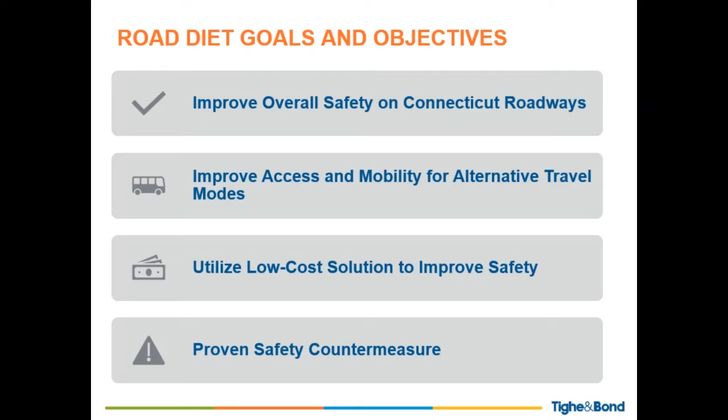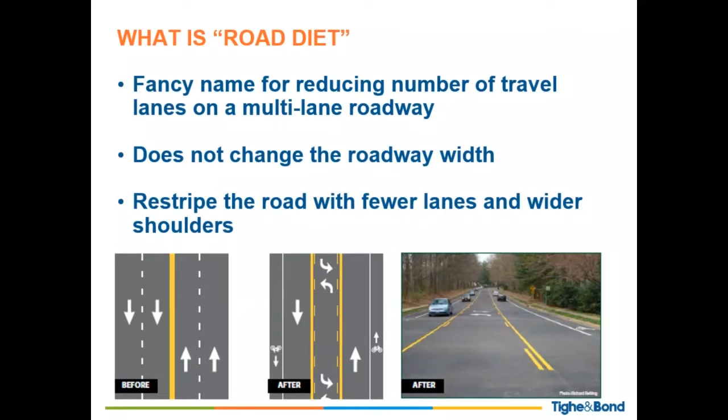Looking a little more closely at the Route 349 road diet, the project limits are Eastern Point Road from Benham Road to Chester Street. That section of Eastern Point Road is currently 3 lanes wide, and we're proposing to convert 3 lanes to 2 lanes. We would reuse the space for wider shoulders, which could accommodate bikes in the shoulders and also increase the buffer between cars and the sidewalks.

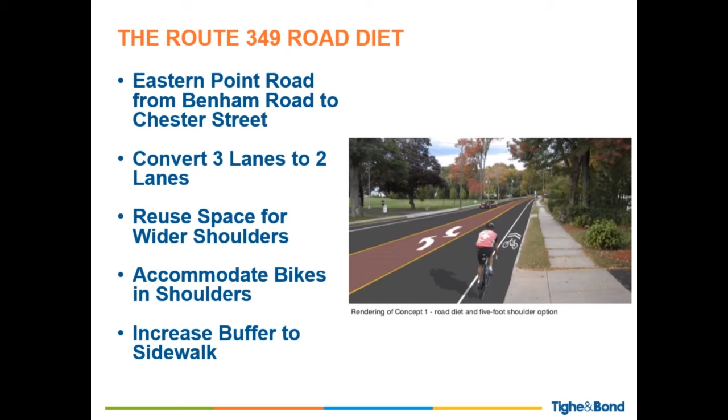So why are we proposing a road diet? A road diet is a proven safety countermeasure. Across the country, they've been shown to reduce overall crashes from between 19 and 47%. They reduce rear end and left turn crashes, and they can also calm traffic and provide for more consistent travel speeds on a section of roadway.

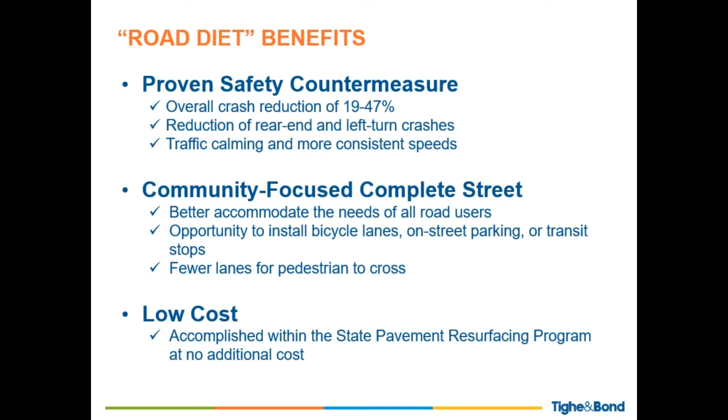Another benefit is that through a road diet, you really convert a roadway to a community-focused complete street that accommodates all road users. And finally, a road diet is beneficial because it can be implemented at a very low cost. For Route 349, the state is conducting a repaving program right now, and if the road diet is approved, we would just apply the road diet pavement markings following that project.

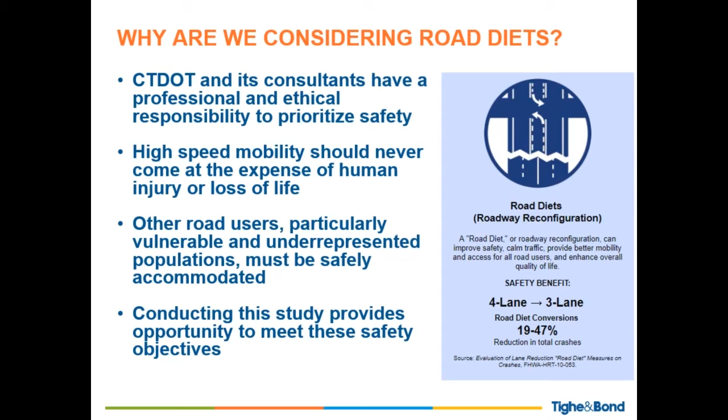We are considering a road diet for 349 because ConnDOT and its consultants, we have a professional and ethical responsibility to prioritize safety. We don't want to encourage high-speed vehicular mobility at the expense of human injury or loss of life. And we want to look at the transportation system for all users, not just cars, particularly the vulnerable and underrepresented populations. And finally, we're conducting this study to provide the opportunity to meet these safety objectives.

The purpose of this public information meeting is to present the community with the data, the concept plans, and the results of our study of why we believe we will make Route 349 safer and more accommodating by implementing a road diet. However, it is each community's ultimate choice to support this safety initiative, and your input is vital to this process. But first, let's go over some of the pros and cons of a road diet. I'd like to introduce Michael Morehouse from Fitzgerald and Halliday, who will take you through the next few slides.

Thanks, Chris. I'm Mike Morehouse with Fitzgerald and Halliday. We're a planning firm that focuses on creating livable places, and that includes developing and designing streets that are safe, equitable, and accessible by all people.

So one of the things that we do is we look at streets based on how they're used, and everybody seems to really understand the motorized uses of the streets. This is the trucks, the cars, the buses, the vehicles that move people around. Well, streets also move non-motorized traffic. People walk on streets, they bike, in neighborhoods, they play on streets. So these are really the mobile users of the street.

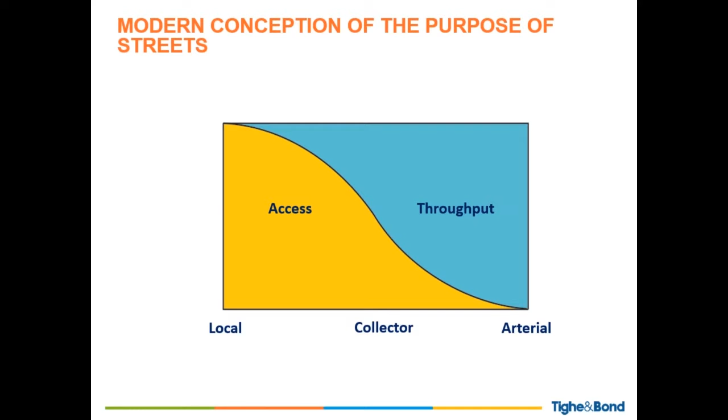But the reality is that's really not how roads work. All roads have a certain degree of access and a certain degree of throughput. And it's important to remember that because our arterial roads, which are designed to carry a lot of traffic, often have some of the highest accessibility in terms of lots of driveways to access property.

What is a road diet and how can it help this condition? Well, a road diet, simply put, is the reduction in travel lanes of a particular road. In many cases, this involves converting 4 lanes down to 3 lanes. So these arterials, which typically have 2 lanes in either direction, have multiple driveways, are really often good candidates for road diets because you don't really always need all 4 lanes to carry the traffic, and you make a much safer situation by replacing one of those through lanes with a 2-way left turn lane or left turn pockets.

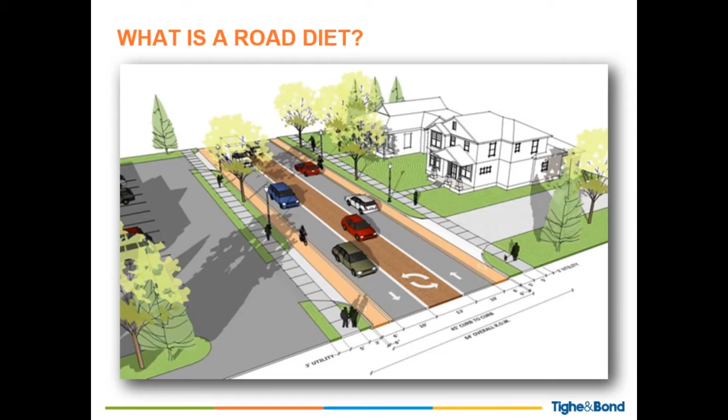There are many benefits to this, including safety, operations, providing amenities for bikes and pedestrians, and of course, overall livability of a place.

So taking each of these benefits one by one, we start with safety, which oftentimes from an engineering perspective is our #1 motivation. 4-lane roads are inherently unsafe because of intersections that we refer to as multiple threat intersections. When vehicles are making a left-hand turn out of a driveway or a side street, they have to consider 3 lanes of moving traffic to make that movement. So a driver has to look at the 2 lanes of opposing traffic that has to be crossed, as well as the moving traffic in the lane that they want to get into.

So with 4-lane roads, many times traffic is traveling at higher rates of speed, oftentimes at higher volumes. It's very difficult to find a gap in the traffic flow to cross through all 3 of these lanes without getting hit. And what that results in is increased delay for those movements. Many times the driver gets impatient, makes an aggressive move to find a gap in the flow that is unsuitable for a safe movement, and that results many times in a crash.

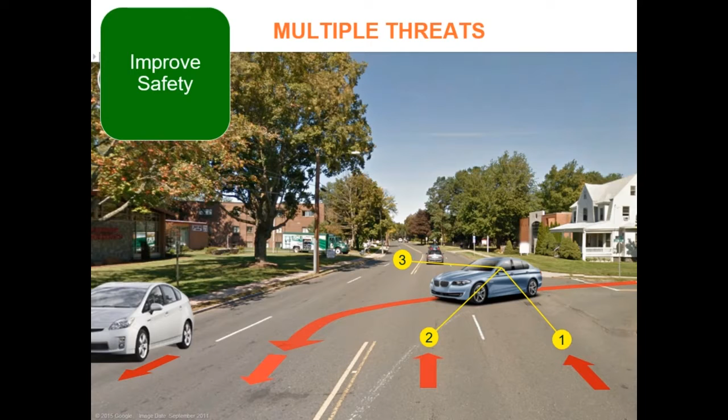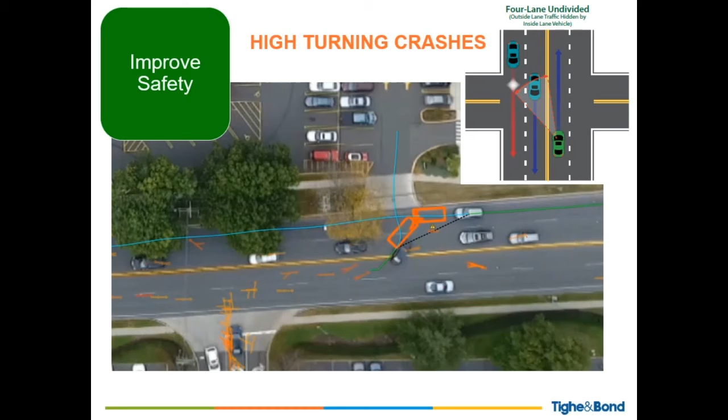This is a drone video of a 4-lane arterial in Connecticut, and what it's going to show you is a typical right angle collision, in this case which was avoided, but using drone video and vehicle traffic software, we can show you an example of how this works. So this black vehicle making a left into the driveway is getting let through by that traffic in the middle lane, and that outside vehicle on the curb lane saw him at the last minute, stopped, and allowed that movement to proceed in a safe manner. However, if that traffic was going faster or if that driver was not aware, then that could have easily resulted in a right angle collision.

The other thing we consider when we're talking about safety is traffic speed. And traffic speed is very important, especially as you get into communities where there's a lot more activity on the adjacent roadside, because as drivers, we can see much more of the overall space within a place if we're traveling between 10 and 15 miles per hour. Our peripheral vision is very wide. We can see our travel lanes. We can also see what's happening on the sidewalks. As speed increases, our peripheral vision diminishes. We start to focus a little bit more on what's happening on the road and a little bit less on what's happening on the sidewalk.

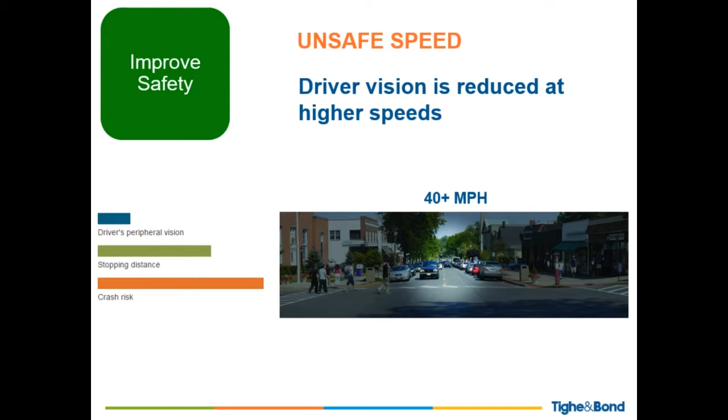At higher speeds, this degrades even further. And then above 40 miles per hour, drivers are typically more tunnel visioned at that point. They're really focused on maintaining travel speeds in their lane, avoiding opposing traffic, but they're very oftentimes unaware of what's happening on the roadside. And this can create a very dangerous situation when there are pedestrians because it now takes much more time to react at higher speeds. Your vehicle requires more mechanical stopping force to come to a stop in a short space, and the crash risk is very, very high. And all of the studies show that a collision between a vehicle and a pedestrian many times results in a fatality above 40 miles per hour.

So there's a general myth that if you go from 4 lanes to 3 lanes, you're going to cause traffic backup. And it's understandable because the math is simple. 4 minus 1 equals 3. Obviously, there's less capacity in that 3-lane section. But the reality is not all lanes really behave the same way. We really have to look at how a lane is being used.

And in a 4-lane road that has a lot of driveways, the inside lanes are oftentimes used for vehicles making left turns. So a vehicle making a left turn has to wait to cross 2 lanes of traffic to get into that driveway. And what happens is other vehicles start to position themselves on the outside curbside lanes. That often results in lane utilizations of 70 to 80% of traffic in those outside lanes and 20 to 30% on the inside. So that's not a really efficient use of a lane. So by reducing the travel lane, you're able to normalize the flow in those through lanes with 1 lane of traffic, and then the left turning vehicles can be managed in those center lanes or in those left turn pockets. It creates a much more efficient and much safer operational condition.

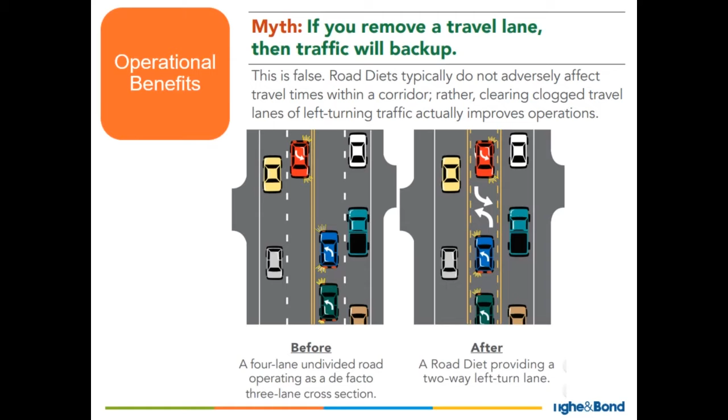And the reality is intersections are often the real determining factor in capacity. When you get to a red light, you have to stop to let other vehicles make their movements. And that's what really controls the amount of throughput in a road anyway. We also have to remember that level of service, which is a measure of vehicular delay, doesn't really describe what is experienced by other users. So pedestrians, bicyclists, people that take transit, they have different performance metrics that relate to their level of comfort and ease of travel. And we have to consider all of those users, not just those behind the wheel. So oftentimes trading a little bit of capacity really could be worth it by creating a much more balanced transportation system for everyone.

Now, when it comes to considering what roads are good candidates for road diets, we have these common rules of thumb, and we use overall daily volume thresholds.

So any road that has less than 10,000 vehicles a day is almost always a great candidate. Requires very little study. It usually works every time. 10 to 15,000 vehicles a day is really the sweet spot. We see a lot of 4-lane roads in this level of traffic, and they're prime examples of roads that could be converted. In most cases, they work.

Between 15,000 and 20,000 vehicles a day, oftentimes they can work very well too. They require a little bit more study. They require a little bit more management and creativity in how left turn conflicts are addressed. But a lot of times engineers can successfully convert a 4-lane road into a 3-lane in this volume threshold.

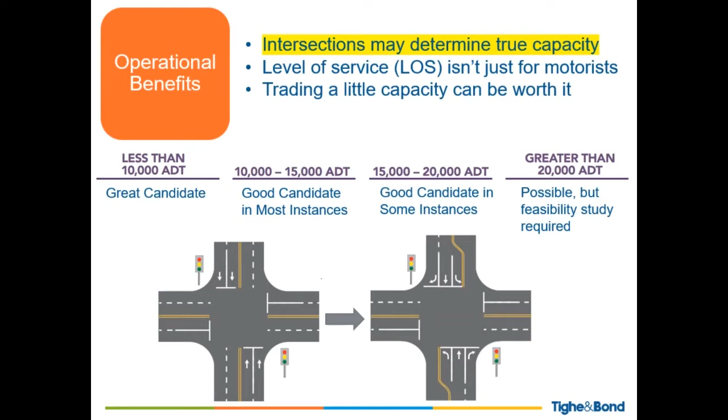And from a pedestrian and bicycle standpoint, there are many benefits. Oftentimes, the road diet results in really a diminishing of the aggressive driving, really high-speed drivers, and that's safer for everybody. There could be up to an 80% decrease in crashes with pedestrians on roads just because of slower traffic. And it's actually really good for vehicles as well, because you have a road that's 4 lanes, you have a lot of weaving traffic trying to get around left turns. You have that crossing traffic that I showed you in the video, trying to get in and out of driveways, and overall crashes can be decreased by as much as 47%.

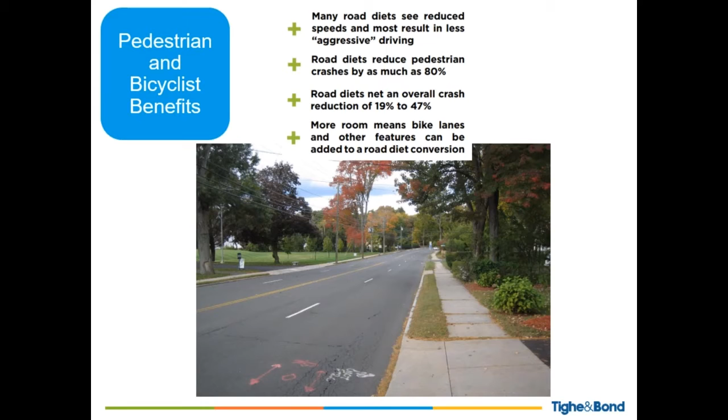So what do you do with the extra space that you take from that additional travel lane? Well, you can use it for many things. And this is just a visualization of one way you can configure a road to create a better roadside environment, a side trail in this particular case. But it could be anything. It could be bike lanes where you have a designated bicycle route that requires bike lanes. It could be on-street parking where you have a thriving commercial downtown environment.

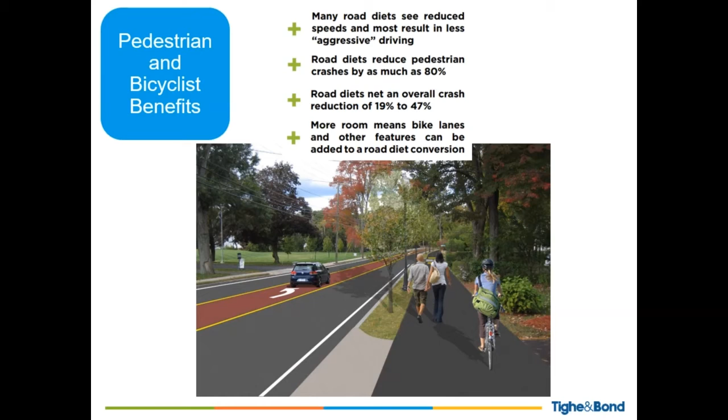And after the road diet was implemented, those really high-speed offenders, those people that were going 15, 20, 30 miles over the speed limit, those were reduced drastically, which also reduced the number of crashes. It also made pedestrian crossings safer. So now you don't have 4 lanes to cross. Crosswalks could be shortened. People walking have better visibility to traffic. So that created a much safer environment for people to move. Bicycle volumes increased dramatically. They took that additional lane width and they created bicycle lanes, and in some places even on-street parking. That was a benefit to businesses.

The other interesting finding was that no traffic diverted. The road was still able to process 13,000 vehicles a day, and the highest levels of volume, which are typically experienced in the morning and afternoon peak hours, we call them, where all of that kind of commercial traffic is mixed in with commuter traffic, the peak hour capacity of the intersections and the road was maintained even in those really high levels of traffic use.

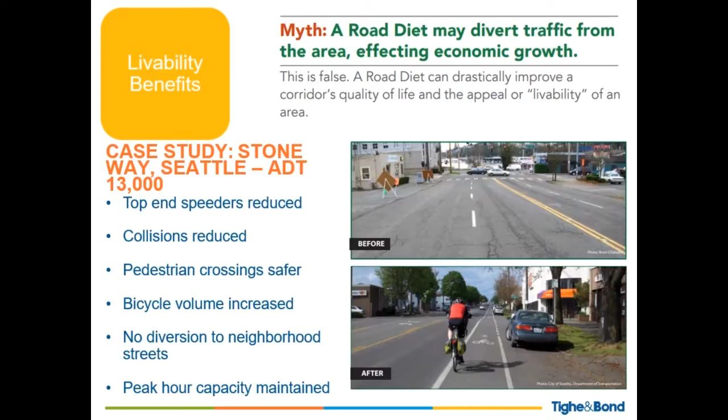There are also many studies that have shown that economic activity can actually be generated and stimulated by a road diet. This is an example of an entire system of road diets that was done in Indianapolis, where they took underutilized street space in the form of travel lanes and decided they wanted to create roads that were more balanced for all users. So they took those travel lanes and they made bicycle lanes and better sidewalks and landscape treatments, and created a much more functional street for all users.

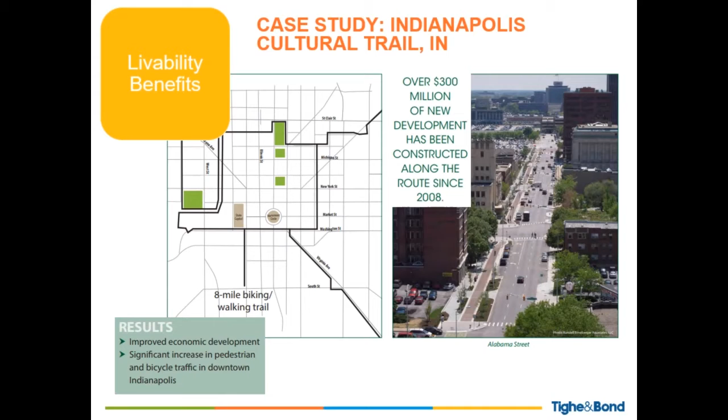And what that resulted in was over $300 million of new development as businesses and people wanted to live in areas where they could move around more freely, that didn't have lots of high-speed traffic. So economic development can actually be really enhanced through a road diet. Are there disadvantages?

Sure, there can be, and there could be increases in travel time. This is why we do a study, just to measure that. And we have to be careful not to measure it against travel time by vehicles that are speeding significantly over the speed limit, and therefore see a reduction in travel time because now they have to do a speed limit, but real increases in travel time over a distance and based on actually the speeds that they should be driving.

And then driver confusion. Sometimes this is difficult because I think people generally do understand how road diets work. They certainly understand 3-lane sections. They're all over the place, and people get into left turn pockets all the time, or they get into 2-way left turn lanes all the time and probably don't even think too much of it.

But when you're converting a 4-lane road to a 3-lane, initially those who are familiar and comfortable with that 4-lane road may find it a little confusing at first, but people will adapt and ultimately we'll see this as an improvement over time.

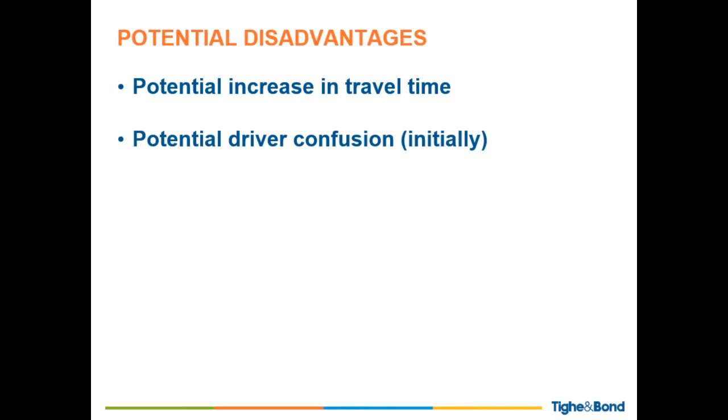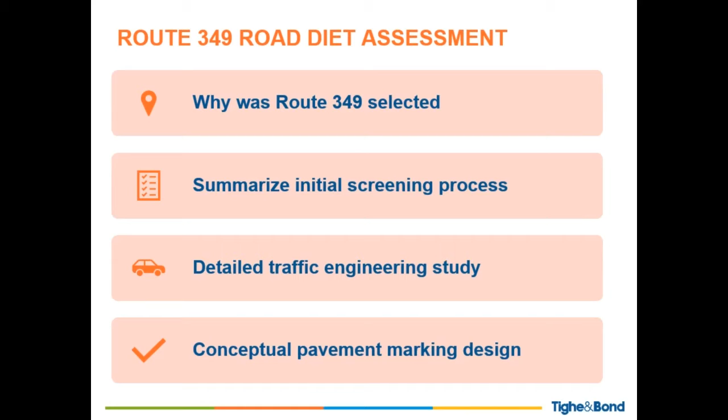Thank you, Mike. And now we'll move ahead and start to talk a little bit more in detail about the Route 349 road diet. Route 349 was selected for a road diet following an extensive screening process where we looked at every multi-lane, undivided highway across the state of Connecticut and conducted a screening process to identify potential candidate segments. From there, we conducted a detailed traffic engineering study of Route 349. And then finally, we developed conceptual pavement markings, which I'll show you in a little while.

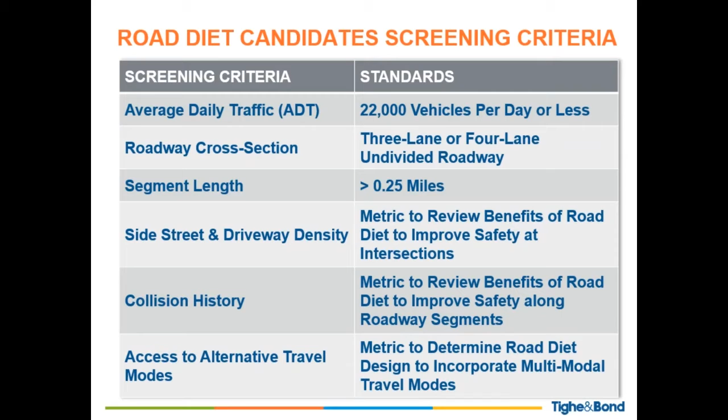We used the following screening criteria to look at all the state roads and determine which ones were viable candidates. The criteria included the traffic volume on the street, the type of roadway cross-section. We wanted to look at segments that were at least a quarter mile in length. We also looked at driveway or curb cut density. We looked at safety, including collisions on each of the segments. And we also looked at how a road diet could have a beneficial effect on alternative travel modes.

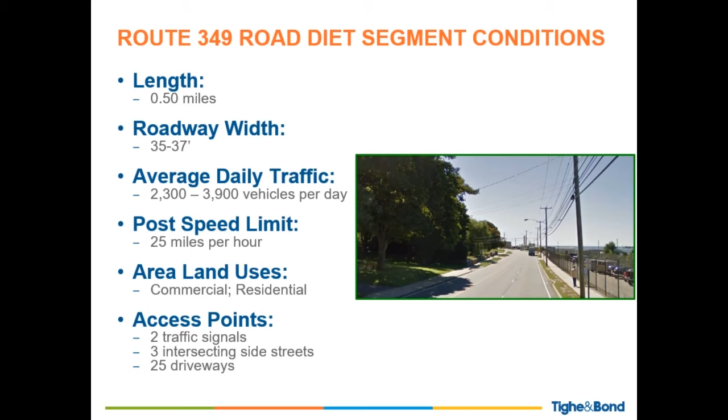The segment of Route 349 being considered for a road diet is the 3-lane section between Benham Road and Chester Street. The segment is a half a mile long with a 35 to 37 foot wide roadway. That segment of Route 349 carries approximately 4,000 vehicles per day, and it has a posted speed limit of 25 miles per hour. And the uses are primarily industrial on the Electric Boat side and residential on the land side. Along that corridor, there are 2 traffic signals, 3 intersecting side streets, and 25 driveways.

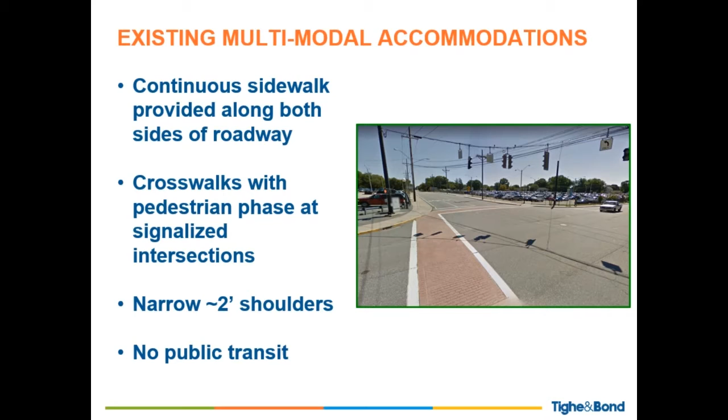Considering the heavy pedestrian traffic that uses Eastern Point Road during shift change at Electric Boat, we looked at what type of multimodal accommodations exist. Currently, the segment of Route 349 has continuous sidewalks. It has crosswalks with pedestrian phases at the signalized intersections. It does have narrow shoulders, and that section is currently not served by any public transit routes.

In order to support the traffic engineering study, traffic was collected at the signalized intersections. We collected traffic data at the intersection of Chester Street and Eastern Point Road prior to the COVID-19 pandemic. We collected morning peak hour and afternoon peak hour turning movement counts at that location. We did not count the intersection of Benham Road and Eastern Point Road because we are not proposing any changes to the lane geometry at that location. So the road diet will have no effect on how that intersection functions.

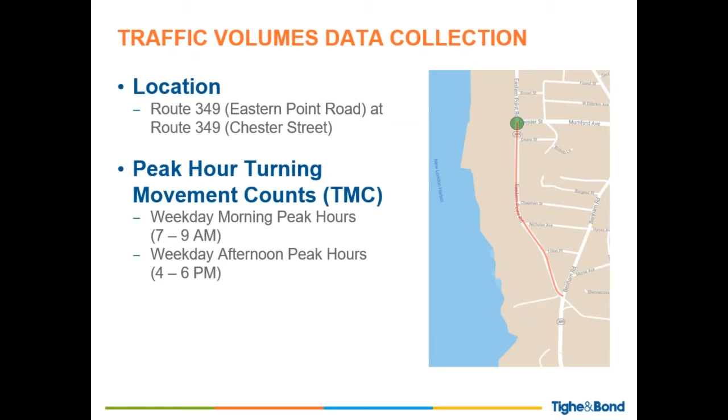The traffic operational analysis compares the existing conditions to the road diet conditions. It determines the operational effect of the road diet on the study corridor. We calculated levels of service and queuing lengths on the approach roadways at each of the 2 signalized intersections. And based on the study, we determined that only minor effects would take place following the implementation of a road diet. The road diet does require signal optimization. However, that just involves some changes in the intersection signal timings.

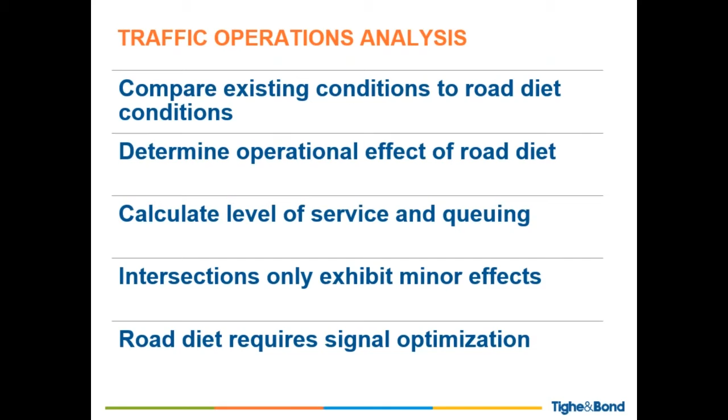This table presents the traffic analysis that was conducted at the intersection of Eastern Point Road and Chester Street. What this shows is that the road diet only has minor effects during the weekday morning peak hour on levels of service. Level of service is a metric that traffic engineers use to determine how an intersection operates. It uses a grading system similar to school, where a level of service A or B indicates very good operations, and the grading system then includes C, D, E, and F, where F is considered failing operations with heavy congestion, delays, long queues, etc.

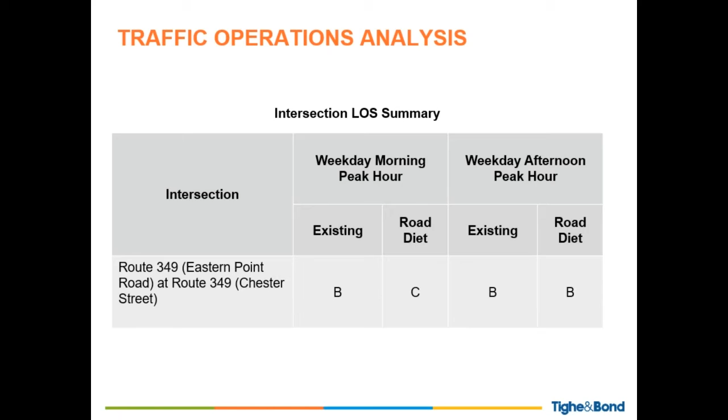So based on the findings of the traffic engineering study and reviewing the corridor, we've determined that the road diet is feasible with minimal operational effects on the study intersections. What we're proposing is to convert the road to provide 1 travel lane in each direction of 12 feet wide, and then a 5 to 7 foot shoulder in each direction. So in essence, we're reducing the roadway from 3 lanes to 2 lanes.

At the Eastern Point Road intersection with Chester Street, we're going to maintain the existing northbound right turn lane. However, we're going to convert the westbound shared left-right turn lane to a dedicated right turn lane. So at the intersection, in the westbound direction, you'll have one right turn lane and one left turn lane. On Eastern Point Road, we're going to provide a left turn lane into the Lot G driveway and then maintain the existing lane arrangement at Benham Road.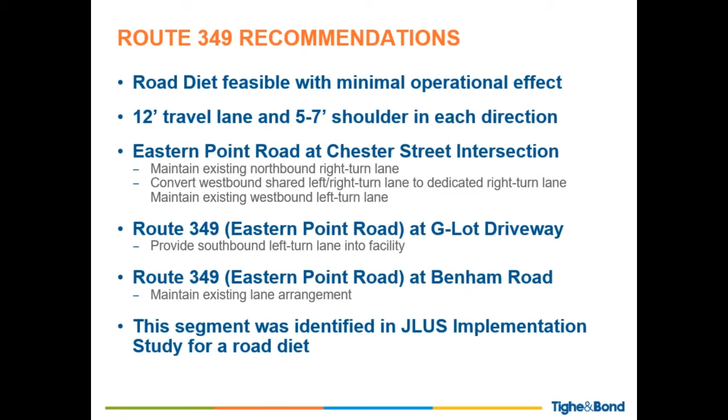Also, this segment was identified in the recently completed JLUS implementation study for consideration of a road diet as part of that study's multimodal recommendations. And now I would like to introduce Parker Sorensen from Fitzgerald and Halliday.

Thank you, Chris. My name is Parker Sorensen. I'm a senior traffic engineer at Fitzgerald and Halliday. I conducted the safety analysis for this corridor as well as all corridors in this project.

This corridor, we looked at a 3-year crash history between 2016 and 2018 for the corridor between Chester Street and Benham Road. There actually was only one reported crash in this 3-year period, and these are crashes that were reported to the UConn Crash Data Repository available online. This crash was not identified as a target crash or a crash that we believed could be mitigated from the implementation of a road diet.

We used Federal Highway research to identify target crashes from the UConn Data Repository in this entire project, which looked at rear end crashes, angle crashes, sideswipe crashes outside of intersection centers, as well as crashes that occurred when there was no dedicated turning lane at a signalized intersection where a road diet might be able to implement one. Target crashes were also identified in this project as crashes involving pedestrians and bicyclists. But again, this crash was not identified as a target crash in this corridor.

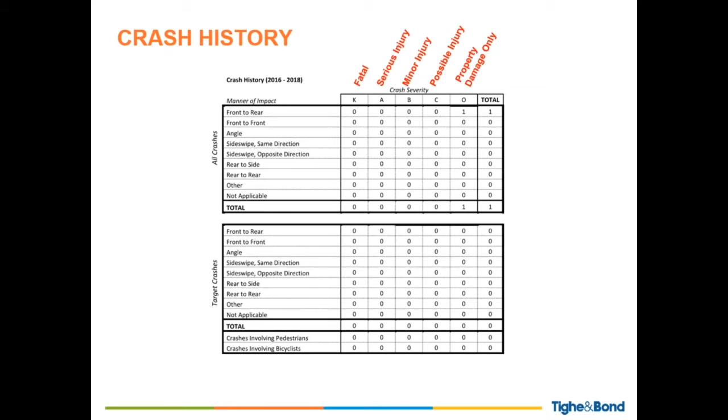The one crash that we did have in this 3-year history was a front to rear crash, so a rear end crash that only resulted in property damage. And that crash was located at the far extent of the corridor at Route 349 and Benham Road.

Now I would like to present the concept plan for Route 349. On the slide, north is to the left, south is to the right, and east is to the top of the page. Chester Street comes in from the top of the page and intersects with Eastern Point Road. Eastern Point Road provides 2 southbound lanes away from the intersection and 2 northbound lanes approaching the intersection. Chester Street provides 2 westbound lanes, an exclusive left turn lane, and a combined left turn right turn lane. And finally, in the southbound direction, Eastern Point Road provides a left turn lane and a through lane.

Under the proposed condition, we modify Chester Street to provide an exclusive right turn lane and an exclusive left turn lane. As you head south away from the intersection with Chester Street on Eastern Point Road, we provide a left turn lane into the parking facility. In the northbound direction on Eastern Point Road, we maintain the existing lane arrangement with an exclusive right turn lane and a through lane. The change comes when we head further away from the intersection, where we eliminate the 2 southbound lanes on Eastern Point Road in favor of 1 lane in each direction with wider shoulders.

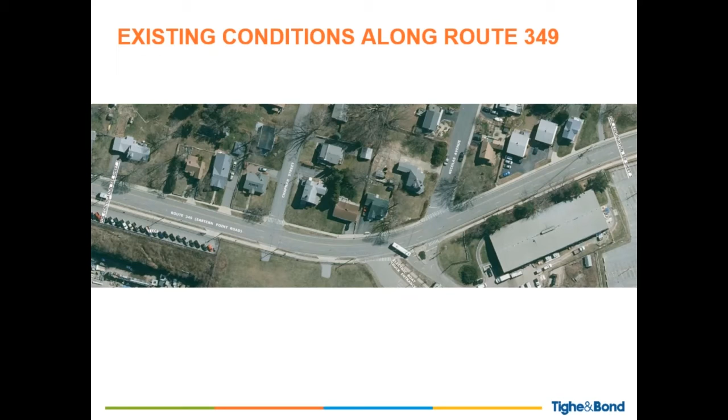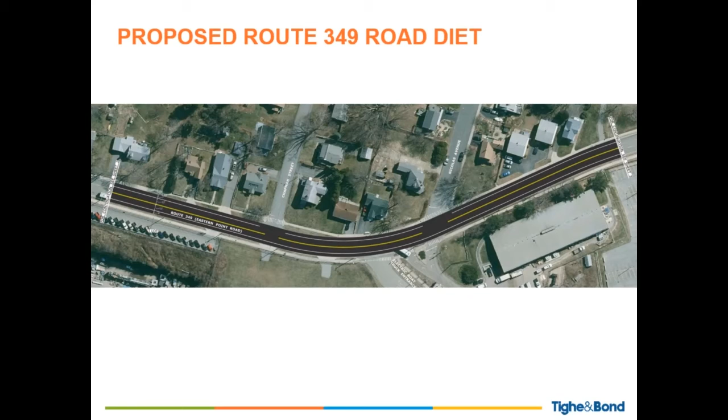As we move to the middle portion, in the existing condition, we still maintain the 2 southbound lanes and 1 northbound lane. We continue that proposed condition where we maintain 1 lane in each direction with wide shoulders in both directions. As we approach the intersection with Benham Road, we are not proposing any changes to the lane use at the intersection.

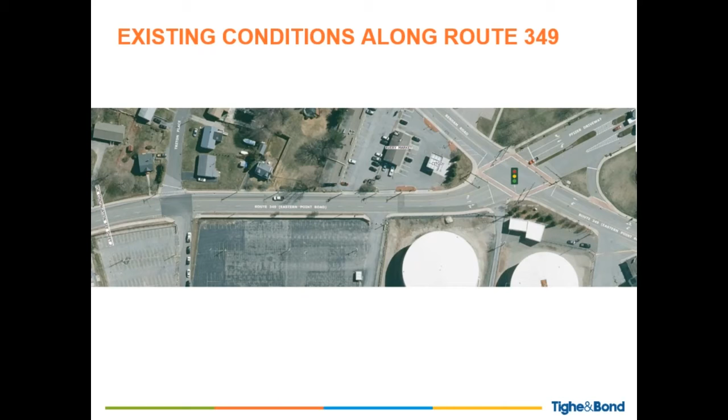As you can see with the road diet concept, we maintain 2 lanes, 1 in each direction with wide shoulders to a point just north of the intersection. And from there, we recreate the 3-lane approach with a left turn lane and 2 through lanes at the intersection with Benham Road.

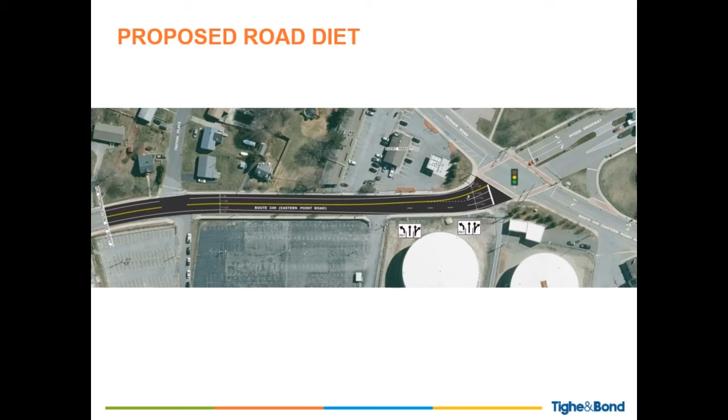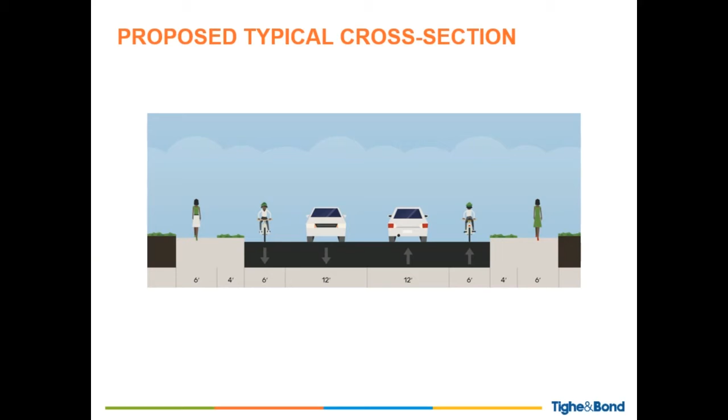This cross-section illustrates what the proposed cross-section would look like on Eastern Point Road in the 2-lane section. As you can see, we're providing a 12-foot lane in each direction with approximately 6-foot wide shoulders, which can accommodate bikes. It also illustrates that the distance now between pedestrians on the sidewalk and vehicles is increased significantly.

And finally, to just briefly touch on the project schedule, ConnDOT conducted the pavement rehabilitation project in September when the road was paved, and then temporary pavement markings were installed. Going forward, if the road diet is endorsed by the City of Groton, the department will remove the temporary pavement markings and install the proposed road diet pavement markings shown in the concept plans.

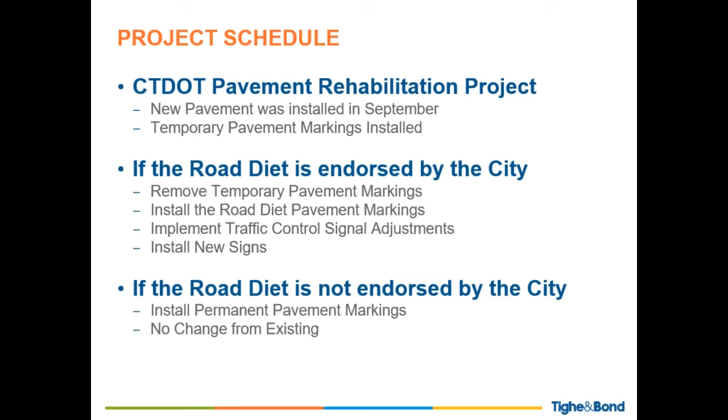They would also implement the traffic control signal adjustments that we mentioned and install new signs as needed. If the road diet is not endorsed by the city, the temporary markings will be removed and the permanent pavement markings installed, and it will look exactly like it looks today with no change from the existing condition.

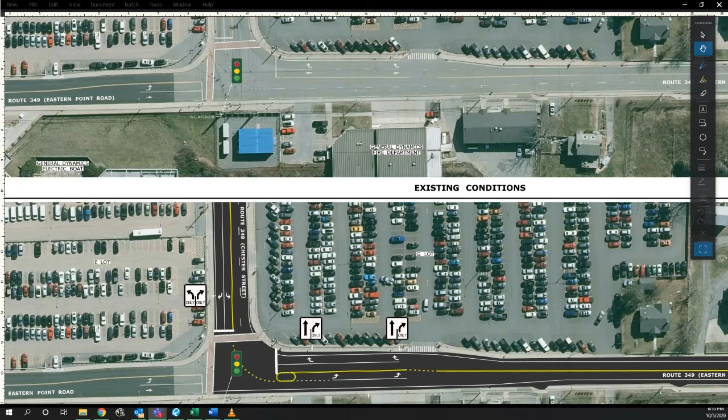We've got another question from Councilor Aundré Bumgardner. I respectfully challenge that the road is not wide enough to accommodate increased bicycle traffic. You have proposed 3 12-foot travel lanes. You can reduce to 2 12-foot travel lanes and have at least 5 to 6 foot bicycle lanes with a 2-foot striped buffer. Why is this not feasible?

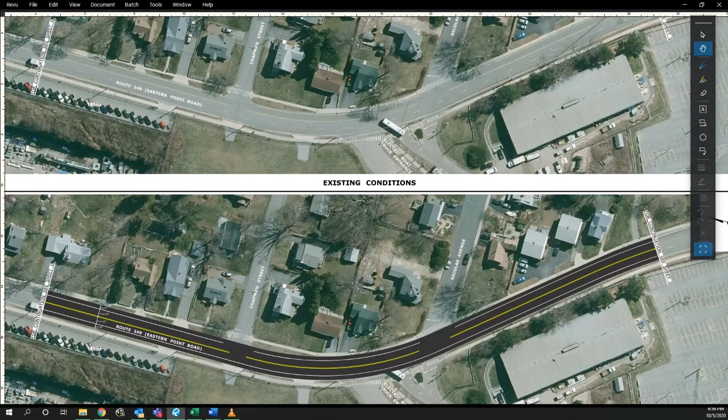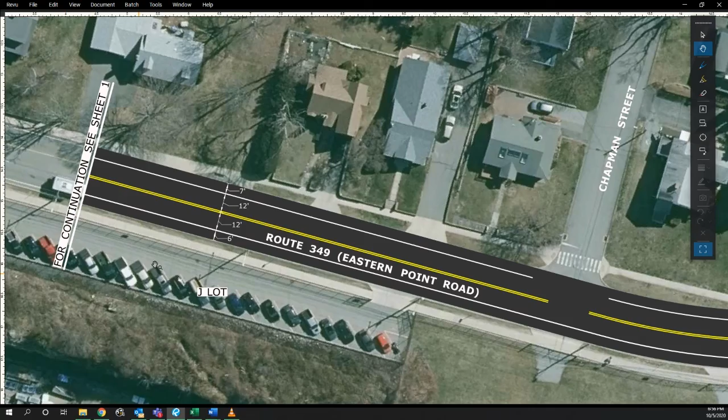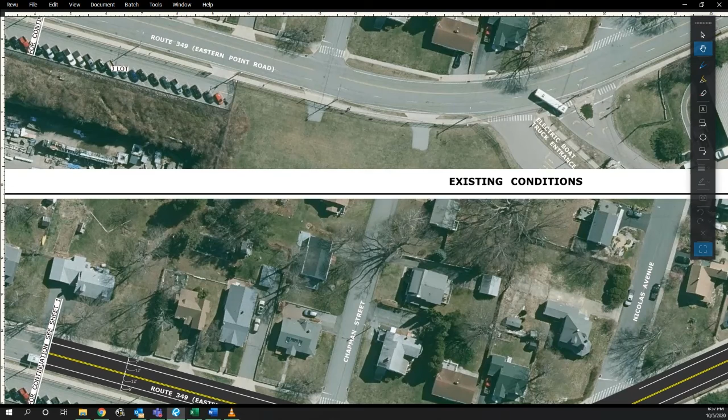I guess I'm not specifically clear exactly where you're talking about. In this section of the corridor between the intersections, we're currently proposing 6-foot shoulders on either side of the road and 12-foot lanes. So we're eliminating the 3 lanes and going down to 2 lanes with the wider shoulders. And under that scenario, I don't think we could fit the additional 4 feet of buffer space within the current cross section of the roadway. Hey, Nick, was this a transcribed question?

Yeah, the councilor amended their question to say they meant 10.5-foot wide travel lanes. Well, I think the minimum travel lane width on a state highway is 11 feet for a through lane, and we did kind of touch on the premise of not having narrow lanes in favor of the wider shoulders in a previous answer. But we can certainly take a look and see if there's any flexibility in the proposed cross section.

Keep in mind that these drawings, while they look like design plans, are somewhat conceptual in nature, and they were developed to facilitate both the understanding of what these various corridors being studied could accommodate with respect to lane widths and shoulder widths, but also to facilitate this type of dialogue with the community. So we will be taking all of these comments focusing heavily on the shoulder widths and the accommodation of bicycles on this section of Eastern Point Road, and we will be discussing that within the team, with the department, to see if there's any modifications.

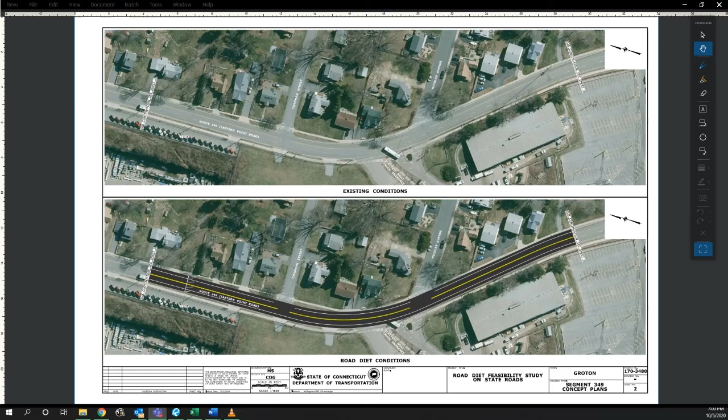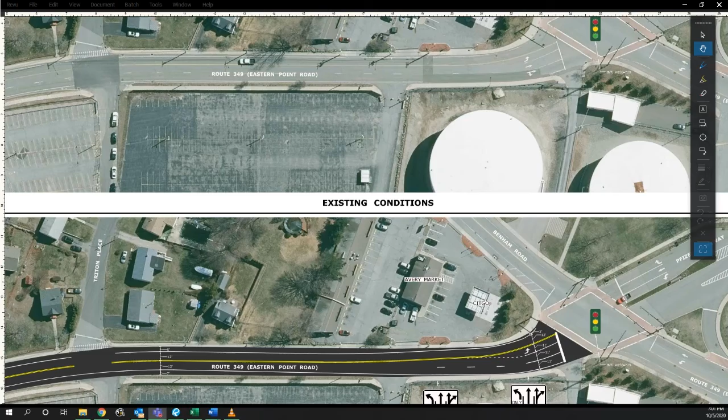Another question from Brian Kent from Bike Groton. The proposed cross section at the north and south ends squeezes bicyclists by limiting the shoulder down to almost zero space. This is a safety risk. I believe that we answered a similar question presented by Kate Rattan that spoke to narrowing down the corridor, and my response was that within the current cross section, without doing a physical modification to Route 349, we would either have to eliminate lanes at the intersection or do a physical improvement to increase the width of the roadway at those locations to accommodate the bicycle lanes through the intersection, rather than utilizing the existing cross section as it exists today.

Another comment from Brian Kent. 11-foot lanes would result in 7 feet each side that could be subdivided into 5-foot bike lanes and 2-foot striped buffer strips. This would discourage parking or passing. As I had previously mentioned, we will revisit the cross section with the department and determine what the appropriate cross section is from a pavement marking perspective for Eastern Point Road between the two intersections.

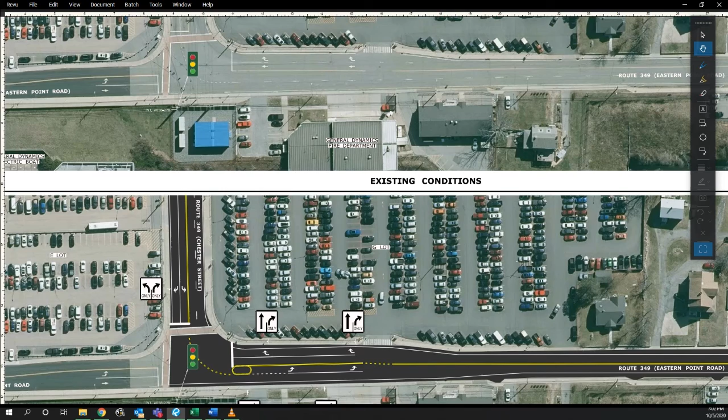Did you want to jump back in, Joe, and answer the question about how this process works? Oh, I apologize for that. I lost my communication for a moment.

The Department of Transportation often works with the local officials, either the local traffic authority or chief elected officials, regarding projects. We seek their input, and it is very, very valuable. In this particular case, after the 2-week comment period, we're going to circle back with local officials and share the comments that were received as part of this process, as well as the ones received in email or voicemail thereafter, and talk to the city regarding what their feeling is, whether or not the department should move forward.

If we do move forward, Chris, as you had indicated, we will restripe and provide the road diet as shown here, or something similar. I understand these are concept plans. If the city decides not to move forward, the road will be returned to its current configuration, and the road diet could always be evaluated at another time.

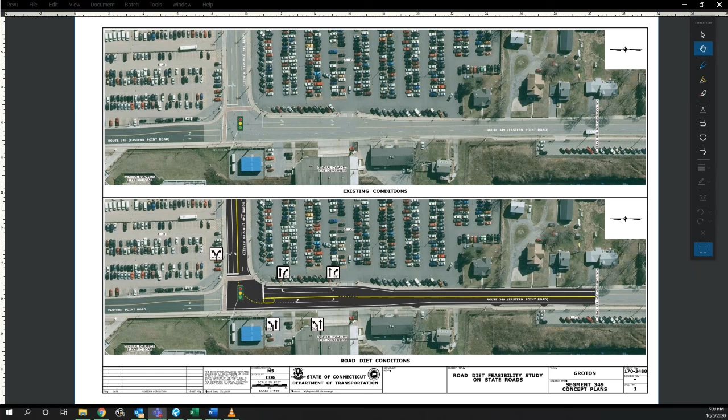We got a comment that came in via email from Mayor Keith Hedrick, and it reads: if the road diet is not completed this year, can it be revisited in future years after construction is completed at Electric Boat Shipyard? And I think I just provided an answer to that comment, where the road diet can always be revisited. It can be revisited as a request from the city to remove existing pavement markings and install new markings. It can be revisited when the road is repaved again in the future.

So, you know, pavement markings are not permanent. Pavement is not permanent, and there's always the opportunity, if the city determines that they don't want to change this corridor now because of construction, then revisiting the pavement markings in the future is something that would be up to the city to approach the department.

The next question is from Brian Sheffer. Will there be additional crosswalks installed? Pedestrians have long distances to walk between existing crosswalks. There's no current plan to install additional crosswalks between the intersections on Eastern Point Road, and consideration of adding crosswalks was not given under this project.